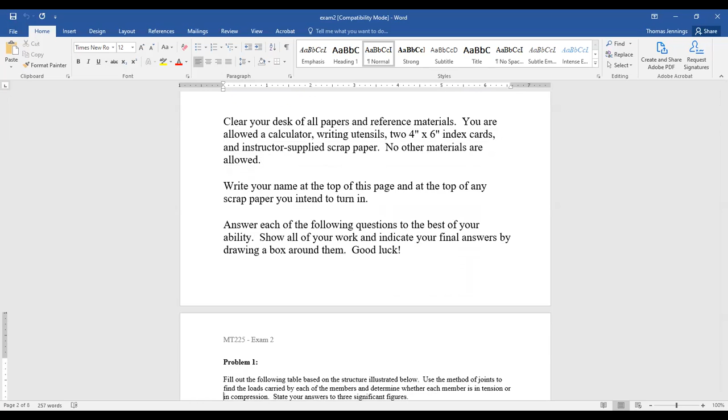And I'm just going to take a quick spin through this to give you some hints, some things to pay attention to, some things to be careful of in solving these kinds of problems. I won't work through the solutions. I'll just point you to the solutions that are already online on that. But just some quick tips and tricks.

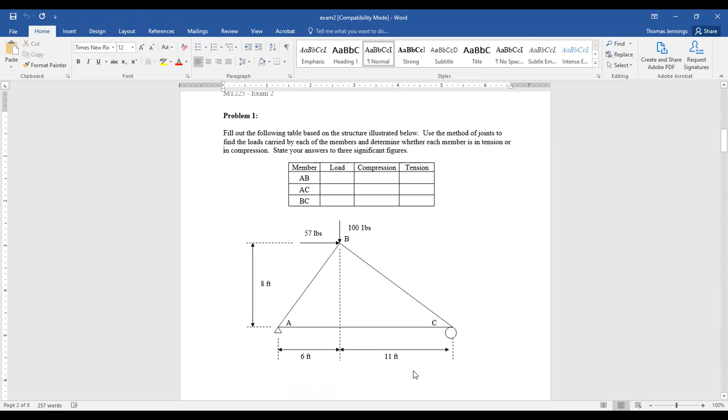One, so here we have a method of joints problem. We really can't do it as anything else, because if you try to do method of sections on this, no matter what section you take, you basically end up isolating just one joint. Watch your angles. I've seen a few errors coming up with people doing adjacent over opposite for their angles. They're getting the complement of the angle that they need, or generally making angle errors. So make sure you're careful about your angles.

Watch your dimensions. Watch out for these horizontal forces. For some reason, the horizontal forces tend to get missed more often than the vertical ones. And both horizontal and vertical forces can create moments depending on where your pivot point is. So be careful of that. If you miss that 57 pounds, you're going to miss some moment in this problem.

You're going to get the wrong values for your reactions at A and C, and you're basically hosed from the beginning. You're not going to be able to get the right answers out of that. So pay very close attention to that external problem. Make sure your answers make sense. Make sure they're reasonable before you start going into the joints.

Biggest problem beyond just being able to do the mathematics for method of joints is getting that tension versus compression thing down. Remember that when we draw the free body diagram of a joint, we are looking at the force the joint feels due to the member. So a member in tension will tend to pull the joints that it's connected to together, while a member in compression will tend to push the joints apart.

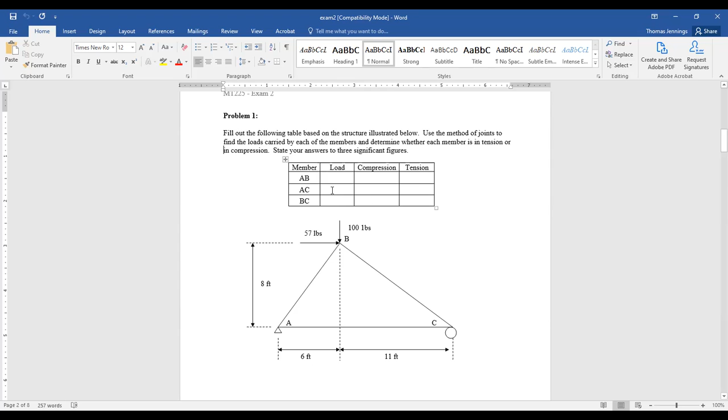Let's jump over to problem number 2. Problem number 2 is a method of sections problem. Don't get thrown by the fact that the supports here are on different levels. You can assume both of these are on horizontals. So a little bit of a strange kind of structure on one end, but not impossible.

Maybe you have a river you're trying to span, and one bank is a little bit lower than what you've got on the other side. Maybe there's an outcropping or something over here, and you can support on top of that. So definitely something we can analyze.

Other than that, let's see, what do they want? They want CD, CG, and GH or HG. So that's right down here through the middle. Make a decision about closing to the left or to the right based on how much work is involved. Most of these are pretty straightforward problems, but sometimes it's a little simpler to close one way or another.

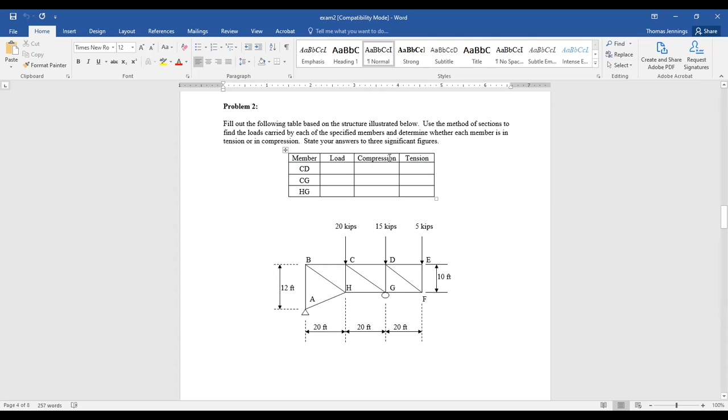I have seen people do that where they calculated it, even stated it was tension, but checked the compression box because they were always used to tension being first. But you can't control what somebody gives you as a table if you have to fill it in. So be careful with that.

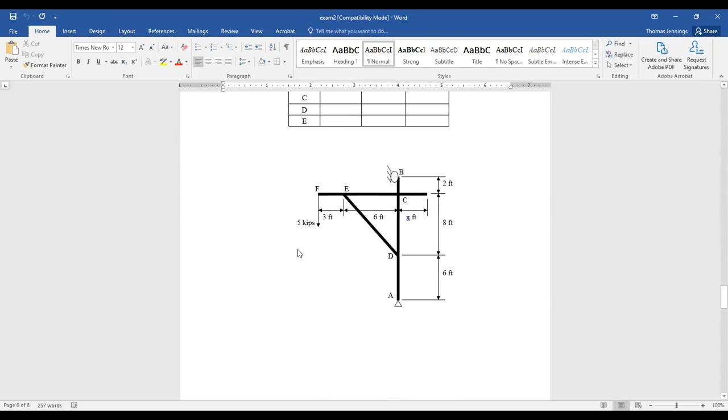And then we've got a third problem here that is a frame problem. So frame problem, got a little crane, similar to one that I worked out as an example problem. Don't get thrown by the fact that g feet is labeled in here. We end up not actually needing that for anything. But here you've got 3 internal joints, C, D, and E. So you've got 6 unknowns there, plus you've got 3 unknowns from the reactions at A and the reaction at B. So a total of 9 unknowns.

You're going to need to do 3 setups. I would do the external problem. That'll actually get me numbers at A and B, since there are only 3 unknowns for the external problem. 3 equations, 3 unknowns, you'll get numbers. Then I would probably work the horizontal member and then the vertical member. I'd leave member DE alone. Just slanted members, you have problems when you pick pivot points and all that.

And then remember here, watch your magnitudes. You may get different signs in the X and Y columns compared to what maybe even I have in my solutions. That's okay here. The signs depend on your assumptions, not on anything necessarily physical. The magnitudes are physical, so those should exactly match. Be careful when finding your magnitudes.

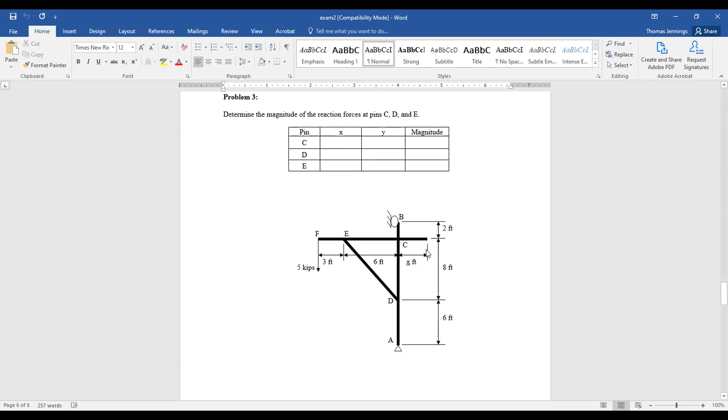If you end up getting a negative after you square something, that should be a big red flag. Something's wrong. The magnitude should always be bigger than either of the 2 values that went to build it. It's the hypotenuse of a right triangle. So it's always got to be the longest side. If you get something that's shorter or the same length, other than say something like B where you only have 1 force, then something's definitely wrong there. That's all that showed up on this one.

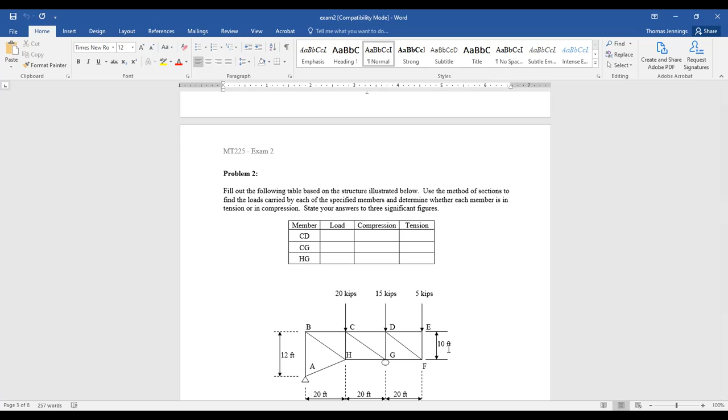I have variations that I've used in the past that have 3 questions, some have 4, some mix things together, some are kind of straightforward. Most are straightforward like this. So as far as what you might expect to see, you can certainly expect a method of joints problem and a method of sections problem. There may be a problem where you'll have a choice where you can decide whether to do method of joints or method of sections. And then there's likely to be a frame problem. So that's what we should expect for our exam.